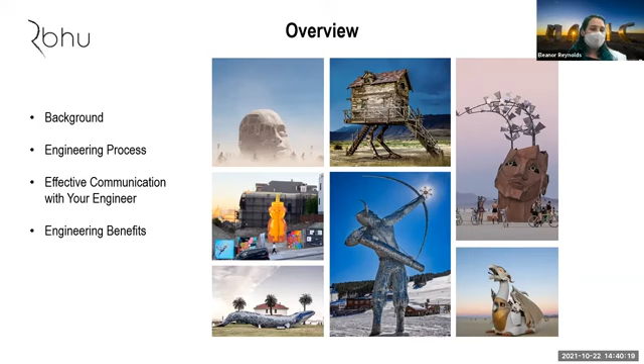So a little background about Rbhu. We are an engineering firm, that's how we identify. We're all engineers, but we have a lot of varied backgrounds - mechanical engineers, civil engineers, architectural engineers, structural engineers. So we have a lot of different experiences and backgrounds that have brought us together. There's usually about 6 of us, but that can expand at certain times of year.

Any comments on sound? How is it on Zoom?

Great. So our first sculpture, which we're going to talk a little bit about in a minute, was done by Selinda in 2010. And then that sort of germinated, and in 2014, Ali, who's my co-presenter, and Selinda formally created Rbhu. Since then, we've done about 150 different sculptures.

There's a lot of variety in that and a lot of different kinds of materials that we'll work with - structural glass and concrete, steel, aluminum. So we're down to work in pretty much any material out there that we can get permitted.

Big pieces, huge buildings and sculptures, down to smaller things that may just need some foundation consulting. We really want to make sure we're there to enable the artists to get their vision installed and out in the public space. We've been really honored to do some that have gotten a lot of press. We're sort of in the background on those, but it's been really an honor to be a part of some pieces that have gotten a lot of recognition. So that's been really wonderful.

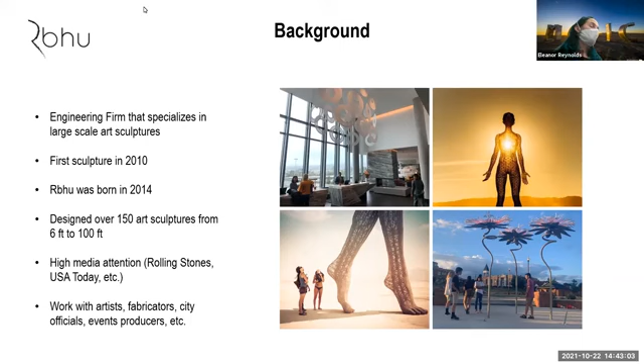And then also with event producers, we do a lot of work with various event producers. This is our origin story - this is Bliss Dance. She is a sculpture that was done by Selinda. She was that seed, and I'm going to get her to talk about it actually.

Hello, MSAers. I'm Selinda Martinez, one of the co-founders of Rbhu Engineering. Wishing you a very warm welcome from Portugal, and also here to tell you a little bit about Bliss Dance, the very first sculpture we engineered in 2010. I was a senior at Cal Poly in San Luis Obispo, California, and this was my senior project - the very first thing I ever engineered. She is a 40-foot tall sculpture of a woman dancing on one foot.

So, no small engineering feat for a new engineer. But she's the catalyst for the birth of Rbhu, and why we're all here today. So, very thankful for that.

Structurally, she is a steel space frame within, and then she has a secondary space frame that makes the contours of her body, and is sheathed with a metal mesh. You can imagine that at the base of her foot there's a lot of forces going through. Believe it or not, in that small footprint we have six 2.5-inch diameter solid steel bars supporting all the loads. She was debuted at Burning Man in 2010, was on Treasure Island in the Bay Area of California for 5 years.

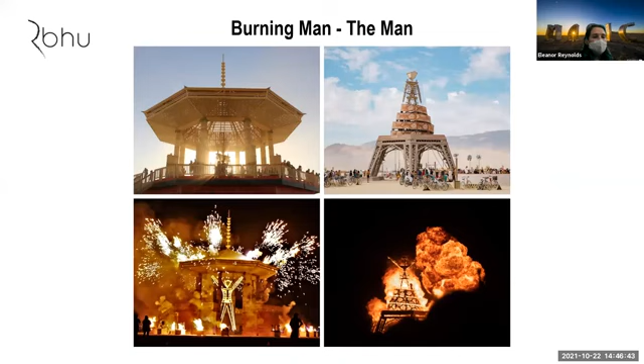We've been really honored by Black Rock City to be a part of their man and their temples. One of the fun challenges, and why I'm showing the man - and I'll show you some temples as well - is that it's a pretty unique condition out in the desert. We have pretty intense windstorms that can kick up a lot of dust, and a very unpredictable level of human interaction with these sculptures.

We really aren't totally sure how the community is going to want to interact, and there aren't a lot of rules. So we're very thoughtful about the way these pieces come together and the way people might want to explore these sculptures, which is incredible, but we want to make sure they're safe. They're very sturdy sculptures that can take a lot of beating, but also they need to collapse and burn quite quickly.

They need to collapse inwards on themselves so they come down safely and burn uniformly. So we're working with the artists and designers to make sure that as we build it, in a couple of weeks, it will collapse down on itself in a safe, quick, and beautiful way, because that's a big part of the experience of the temples and the man.

The other realm we work in a lot is the public art sector. That has a lot to do with the fact that jurisdictions will often require, if not always require, their artists to engage with a licensed local engineer - this has to do with public safety and bureaucracy. But we really see ourselves as a way to enable artists, coming alongside them to help them get through the process and achieve their vision, and help them connect with fabricators.

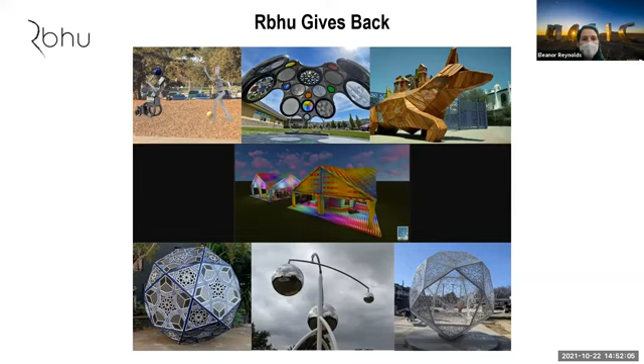I'm going to turn it over to Ali. All right, well I'm going to talk about the engineering process, the most interesting part of this - I'll try to make it as fun as possible. So there are 6 steps that I'm going to go through from the beginning to the end, what the beginning looks like, towards the end, what the end product looks like from the engineering perspective.

So first, what we need is an idea. We need your idea to be able to understand the sizes, the height, the width, and all the parameters needed for the engineering. So the best way to do that is - first of all, we want your idea to be dialed in perfectly before you hand it to us as engineers, because when we start the work, we are pretty much assuming the vision is dialed in and the aesthetic is how you want it.

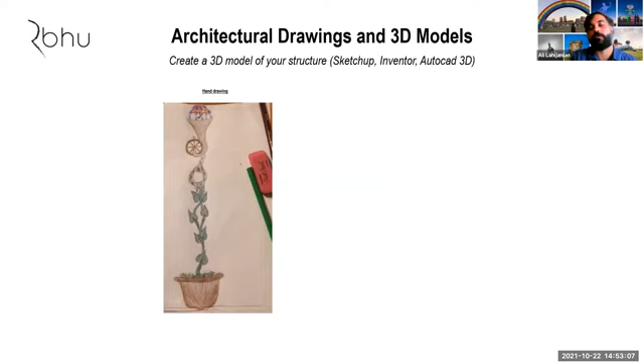So for you to be able to do that, this is a suggestion, bring your vision into a virtual world, a 3D model, to be able to understand the ratios, the aesthetics. In the virtual world, obviously it's a lot cheaper to change things, update, and make any changes aesthetically you need. There are a lot of free programs out there like SketchUp, Inventor - I think for students it's free - and AutoCAD, but there are also a lot of free 3D modeling programs you could find if you search online. We highly recommend doing that because, as I said, it's a lot more economical to change things in the virtual world.

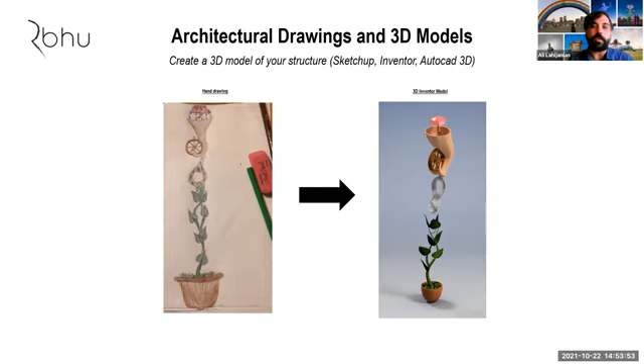And after you make a 3D model, we suggest - also going to the 3D model aspect - it really helps with the mechanical systems, to be able to dial in your mechanical component. So this, for example, is Noetica, that was debuted in 2017.

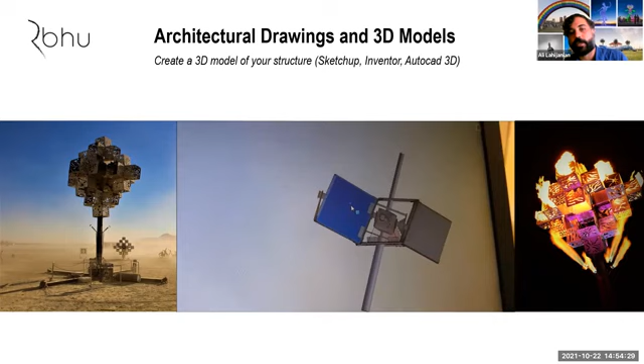We came up with this very complex bearing system that had to have 6 degrees, 3 degrees of freedom, and there are cubes that are moving in space. When we 3D modeled it, we realized there are clashes within the cubes, and that this system is not working as well as we thought it would. So we went back to the drawing board and came up with a really simple system. It's just a ball joint with wires coming up, and we modeled it and it worked perfectly. So we were really happy.

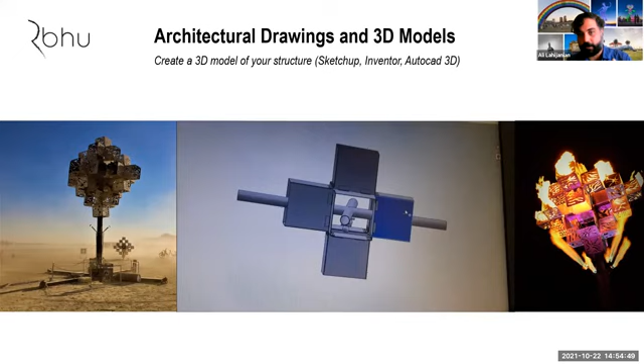Then we proved the concept through a 3D world and virtual world, and that was a lot more economical than actually prototyping. So after you bring your vision to the 3D world and figure out your aesthetics and iron out all the kinks, we recommend doing a scale model.

So this is Eelgrass, a project that we did. It's in Richmond, at the ferry building. The artist, you can see on the left, sketched it, then made the scale model. We highly recommend, after doing the 3D model, doing a scale model in mini scale or full scale out of a different material to dial in the aesthetic again. It's very important for you to hand in a product that you're happy with visually to an engineer.

There are other ways you could make a scale model. You could 3D print with today's technology - everything is easier than before. You could take your 3D model and just print it. In the physical world, you can see it, see the ratios, and make the aesthetic changes that you need.

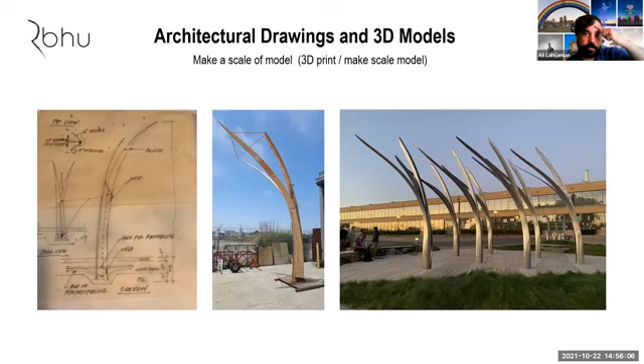So after you dial in your aesthetic vision and you know this is what I like, this is what I want, you want to hand it to us. The reason we say that is, for example, in the middle of engineering, you might say, oh, I don't know if I like this ratio, I want to make it smaller, I want to make it bigger. Those changes have huge impact, or they could have. Maybe some changes won't, but there's a potential - some changes have huge impact on the engineering, and we might have to start from scratch.

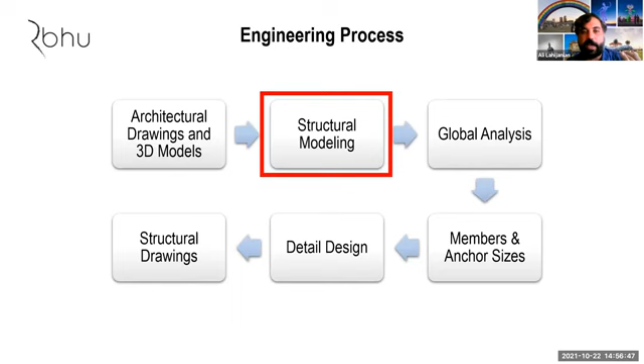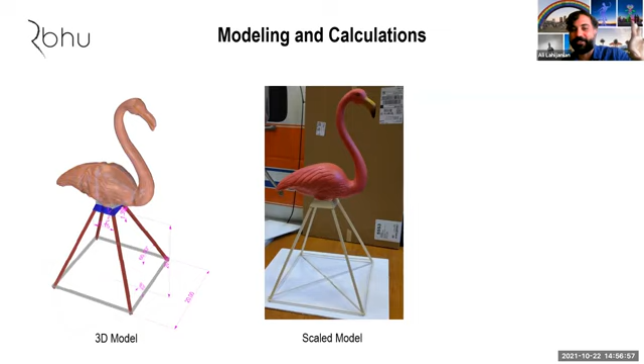So after you do the 3D model, I'm going to show you this example of the flamingo. Also, this is a very controversial piece - people think that we made the piece have 4 legs. No, the artist wanted the piece to have 4 legs, so I just wanted to put that out there before I talk about it. He made a 3D model, figured out all the dimensions, the heights and everything, then made a scale model, and handed it to us.

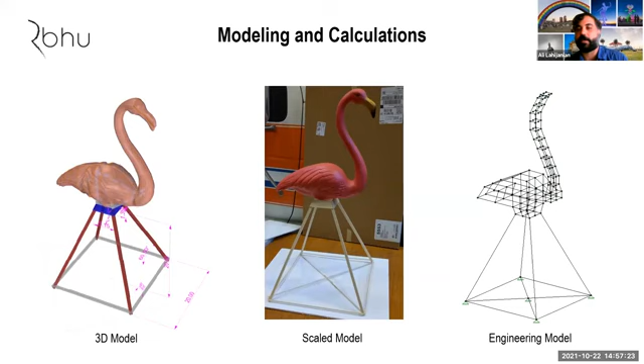So we start with the global analysis. What is global analysis? Meaning that we're going to size the tubes, the pipes, the plates, and the I-beams - all that is the global analysis. So we take the model, we put the wind load. In this case, there were also humans going up the ladder and going to the top, so we put the live load. These are all the loads that the structure will experience.

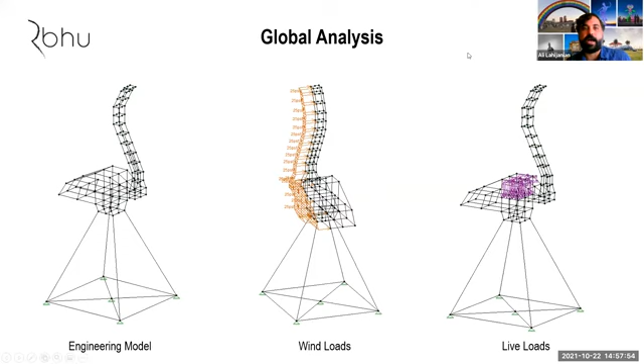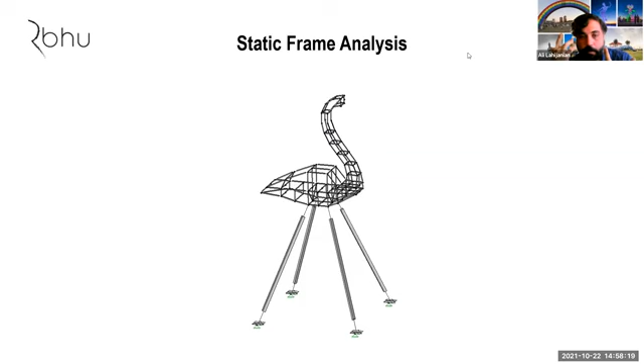Then we do the analysis. There are 2 types of analysis: one is static, meaning it doesn't move, and another is dynamic. Within static or dynamic, there are 2 types: one is frame, another is shell - shell meaning it's made out of plates. So frames are like square tubes, pipes, I-beams - well-defined components or members. And shell analysis is made out of plates.

So for example, in the temple that Eleanor showed earlier, the crown at the top is made out of plywood. So it's a little bit more complex engineering.

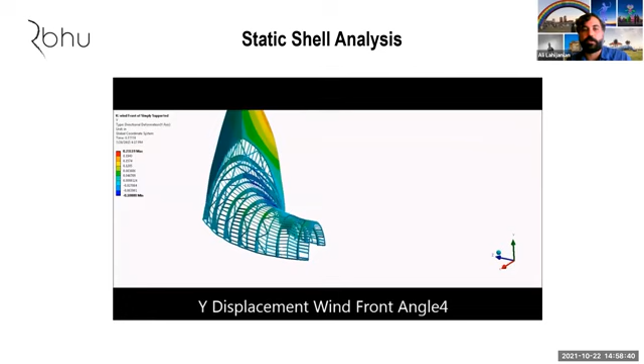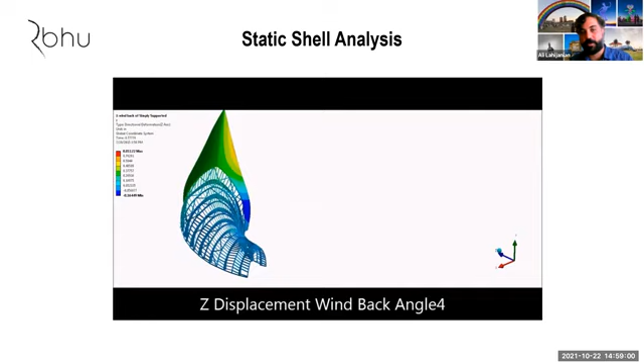It's a different analysis, but it's very well possible. So you can see in this video, the wind is hitting it in different directions. You can see the movement. This is exaggerated by about 40 times—with the naked eye, you won't see that much displacement. So it's not that scary, but we do our analysis so we understand the movement, the motion, the load path, and then stress.

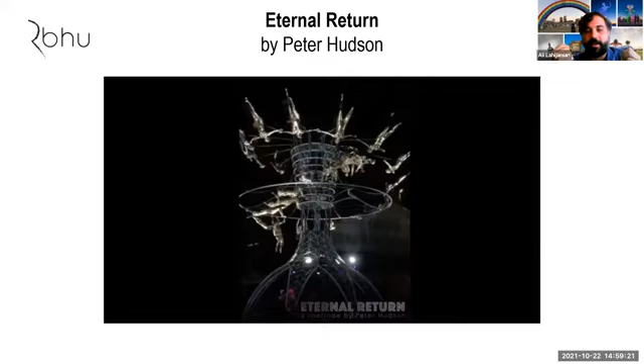So the next slide, we're going to talk about the first sculpture that I engineered, Peter Hudson. He was in Marco Cochrane's shop, so he needed a mechanical engineer, and I joined his team. This is a stroboscopic zoetrope.

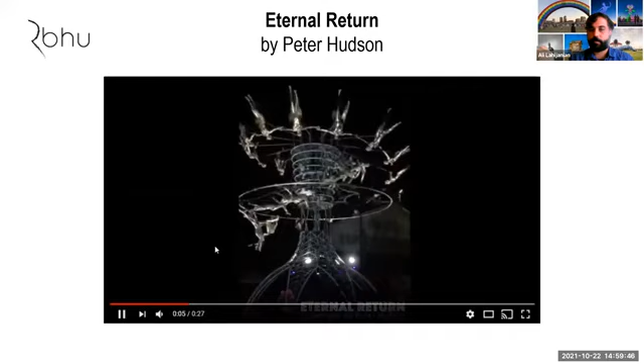It's 24 feet tall, with cast human figures going up the ladder and doing a backflip. The frame rate of the video doesn't match, so you can't get the full effect since the strobes don't match the frame per second, but you get the idea. This is dynamic—the top portion moves, and these figures look like they're going up the ladder and doing a backflip.

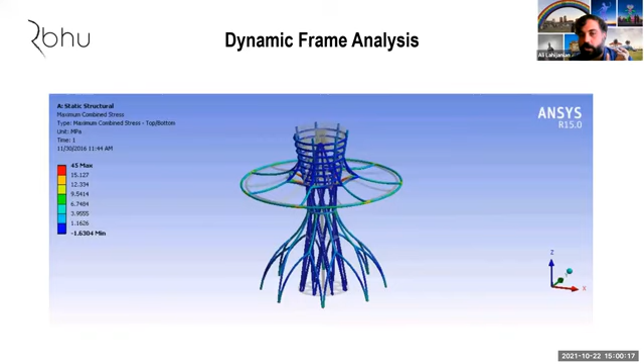For this one, this is a dynamic analysis, and as I mentioned, they're frames. So you can see these are the Schedule 40 4-inch tubes. The red parts you see are hotspots, meaning they're seeing the most amount of stress. In this case, they're not failing—they're still way below the allowable, but you can see the critical parts of the structure that need more attention.

On the next slide, you can see the plate analysis—this is the shell analysis. As I mentioned, it's a bit more complicated because you have to discretize it, but that's the type of analysis we have to do. Everything is blue except that top part that's turning, where you see the stresses are mainly concentrated, but again they're below the allowable. So that all worked out.

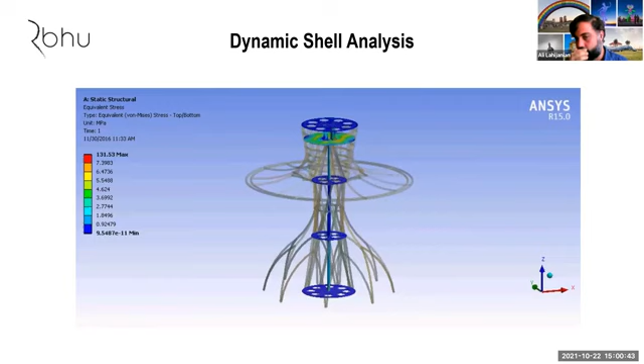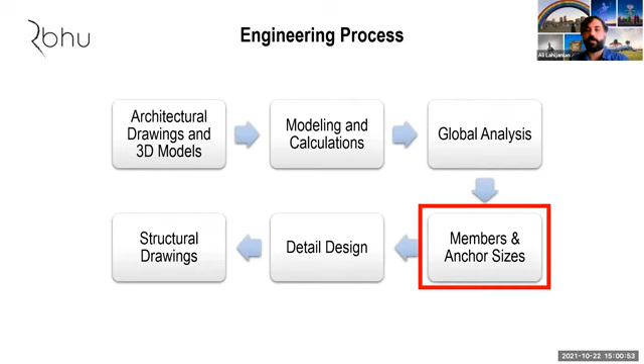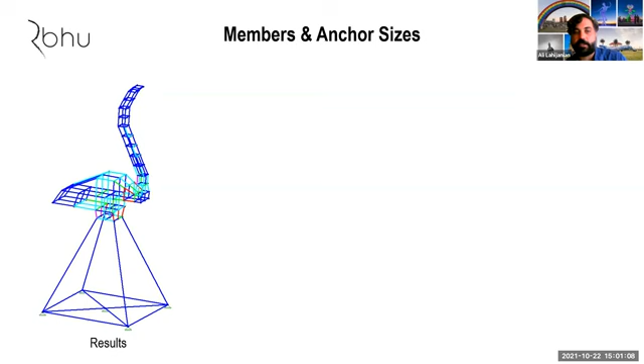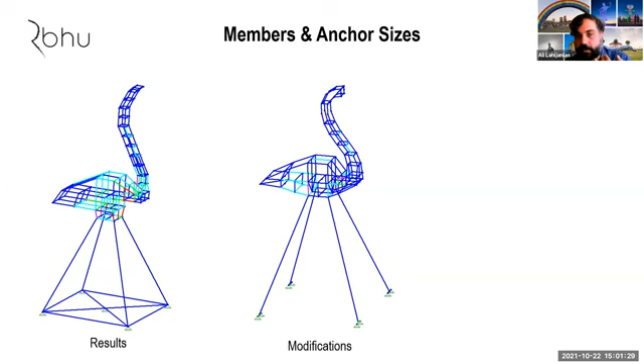So we achieved that, and at the end we came up with the sizes. The legs were 6-inch square tubes, 1/4 inch thick, and the body was 2-inch square tube, 1/8 of an inch thick. After we come up with that, we also know the loads for the anchors.

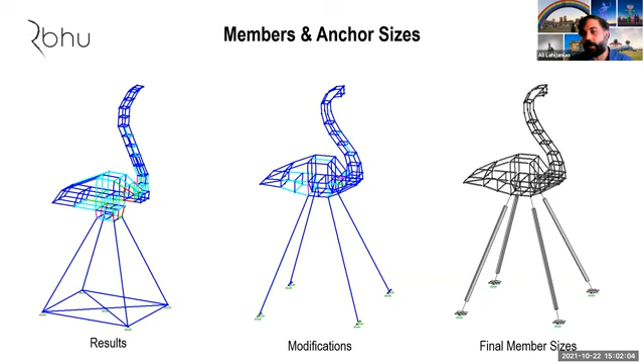Sometimes for city projects, for example, they want to put in a foundation. So this is the point where we're like, okay, now we can design the foundation, now we can design the anchorage and base plates. So they can do their thing while we finalize all the little details and nuts and bolts, which I'm going to show you on the next slide.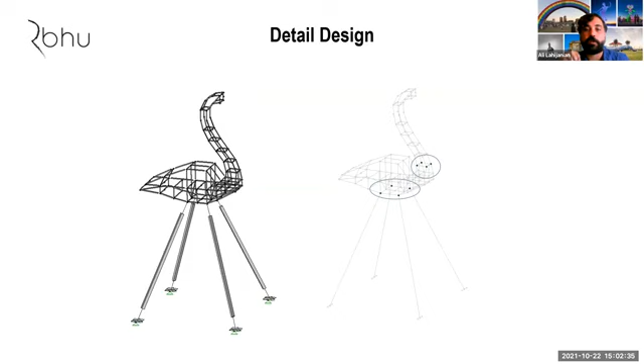We do the detail analysis—meaning all the connections that are happening, nuts and bolts. In this case, there were 2 attachments: the neck was separated from the body, so we needed to design a bolted connection there, and also the legs were all coming off and needed to be attached. After global analysis, we know what forces are going to each of those nodes or points, and then we take that and do the analysis.

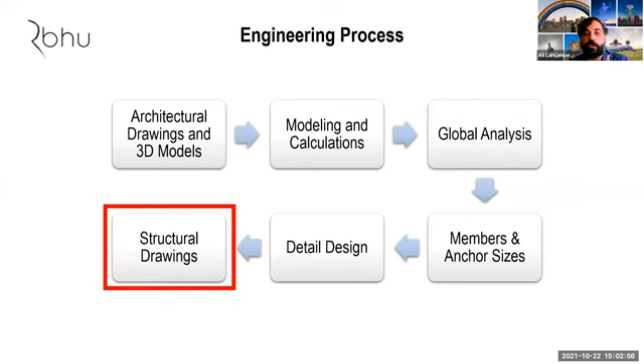From that, we should have all the sizes of the plates, nuts and bolts, all the global analysis. Now it's time for us to communicate with you what these are, so we do structural drawings. A structural drawing is pretty much the blueprint of your piece—you know everything you need to know about the sizes. I want to mention that structural drawings are different than shop drawings because they're not dimensioned for you to cut and build, but they have all the sizes and global dimensions that are needed.

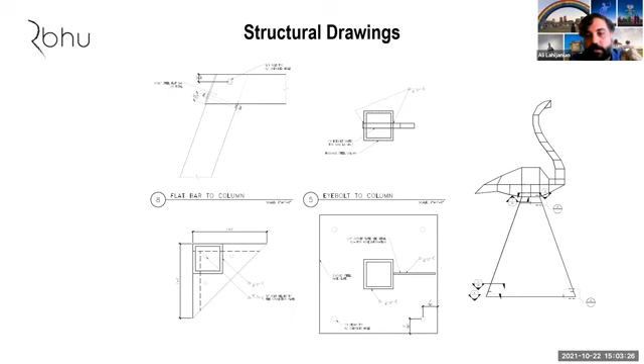And you can see in the base—in the next slide you can see the plate, like the bolt distances, exactly what welds you need to use, and what are the details of, for example, the anchors. This was a Burning Man project, and we used ground screws for those with guy wires. You can see that on the left, and on the right you can see the body attachment, how we went about it with 3 bolts—I think there were 5/8 bolts—and you can see edge distances are really important, so there's no tear-out and we don't face issues.

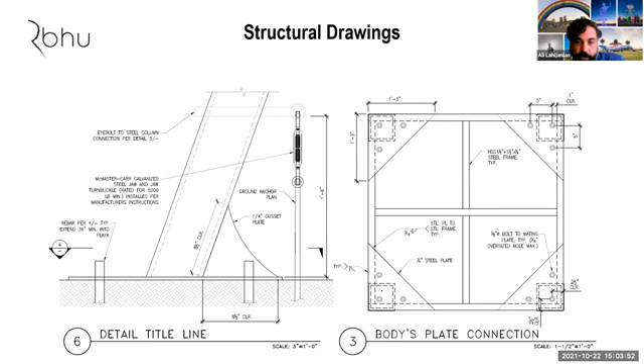So that's pretty much what comes out of it. For permits, the cities require structural drawings that are stamped. We've done projects all over the US, and we're looking forward to doing more around the world. In addition to the structural drawings, we need a calculation package, so all our analysis goes into a report showcasing the loads and forces, and that goes along with the stamped drawings so the city can review it and issue the permit.

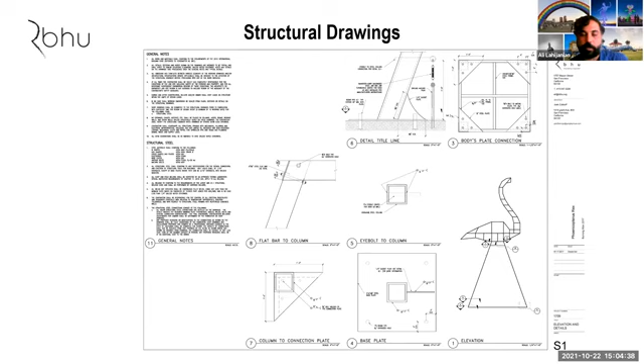So this project, he did all the steps we talked about, and in the end it was a very successful project. He got a lot of media attention, even though it was controversial because it was 4-legged, but a lot of people loved it. Rolling Stone wrote about it, ArtNet, USA Today, and we were honored to be part of this. The artist's name is Josh Zubkoff, an amazing artist we've done multiple projects with. This was the first large-scale art project he did, and we collaborated really closely. From then on he made multiple other sculptures you may have seen. One of them, actually the one behind me, Rainbow Bridge, is also Josh Zubkoff. He's a very successful artist now.

So let's talk a little bit about communication with your engineers and engineering friends, and some strategies. One of the things about being an engineer is we're working with the laws of physics. There are some things we can play with, but ultimately we can't control gravity, and we have building codes that require us to design to certain standards.

So it's really helpful when we're working with artists to understand what's really important to you, understanding your priorities and goals, so we can help steer you toward the path that gets you as close to those goals as possible. But also, don't give up on your vision right away just because you talk with some engineer who's scared or unfamiliar or doesn't know what to do with something that's not very conventional. Get a second opinion.